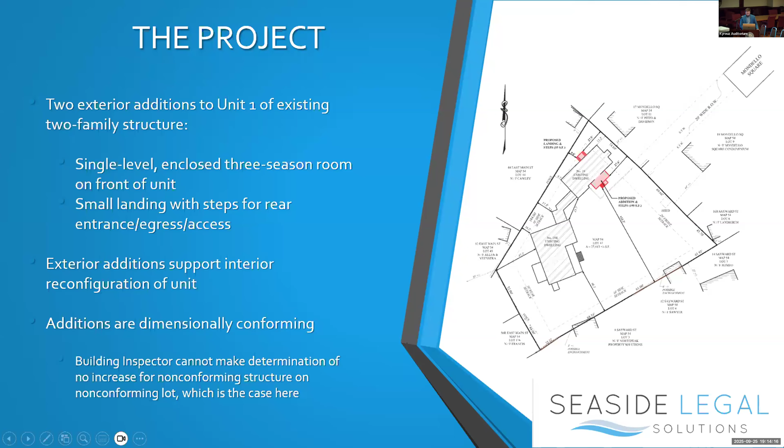Just by way of background, we're in the R10. The existing 2-family structure, we actually permitted that via special permit last year, for the change of use. And the addition to the structure itself, again last year, was dimensionally conforming. So this board gave it a determination that no special permit was necessary.

The existing nonconformities are, as I mentioned, the Mondello Square butts out at the property, so we have insufficient actual frontage. And the existing Unit 1 actually encroaches - again this is the rear of the structure, but it is the right side yard setback area. So there is a slight existing encroachment there.

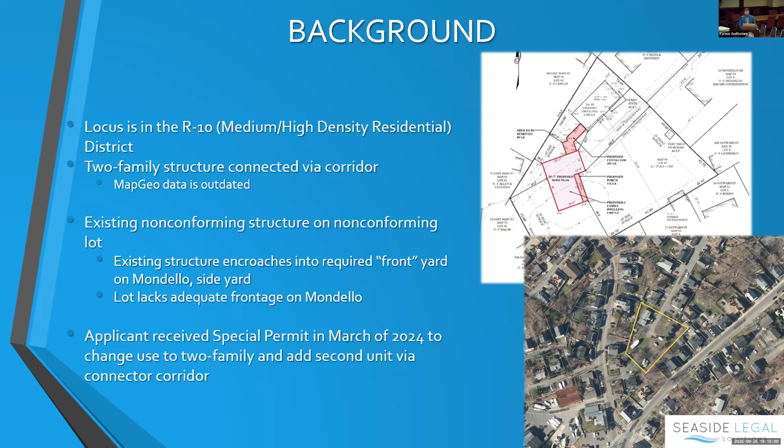So again, tonight we're going to be requesting another determination that there is no increase in the non-conforming nature of the structure. And if the board does decide that there is an increase in the non-conforming nature, we would ask in the alternative for a special permit to alter and expand the non-conforming structure.

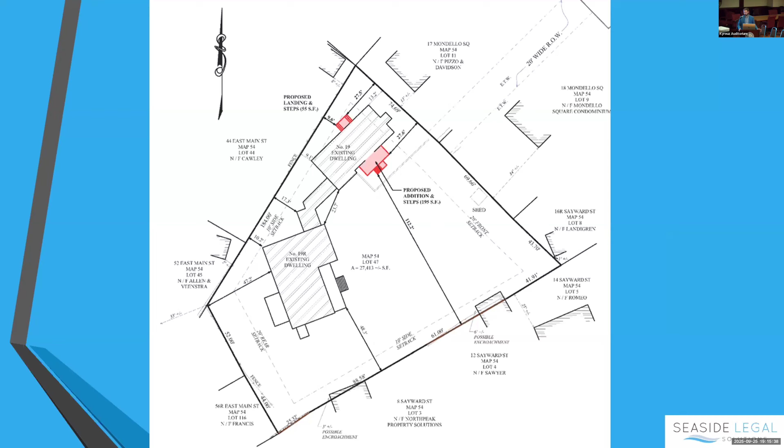So here are the plans. You can see on the site plan that front and rear addition, they're both dimensionally conforming. That rear addition does encroach slightly into that right side yard setback area, but it is only an uncovered landing and steps, so it's within that 3-foot allowance. So it is all dimensionally conforming.

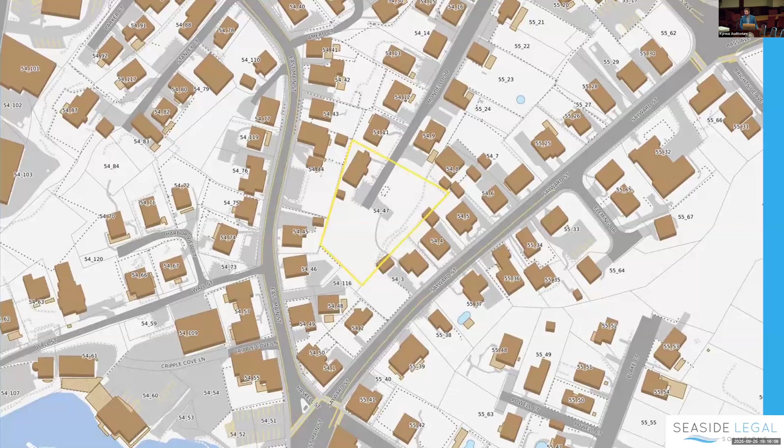So again, the building inspector can't make a determination that there's no increase in nonconformity where the lot and the structure are both nonconforming, but the board under 2.4.4B can make a superseding determination. And for the following reasons, I will ask that you make that determination.

So the existing nonconformities again are the lack of frontage, and as you can see zoomed in here, there's a front yard setback encroachment of the existing structure.

Again, though I keep saying that we're adding an addition to the front of the structure for setback purposes, we're not doing anything in that front yard setback area. And that rear addition is just partially in the right side yard setback area, but it is well within that 3-foot allowance. So we're not doing anything that increases any nonconformity, in my opinion, and I would hope that you share that opinion.

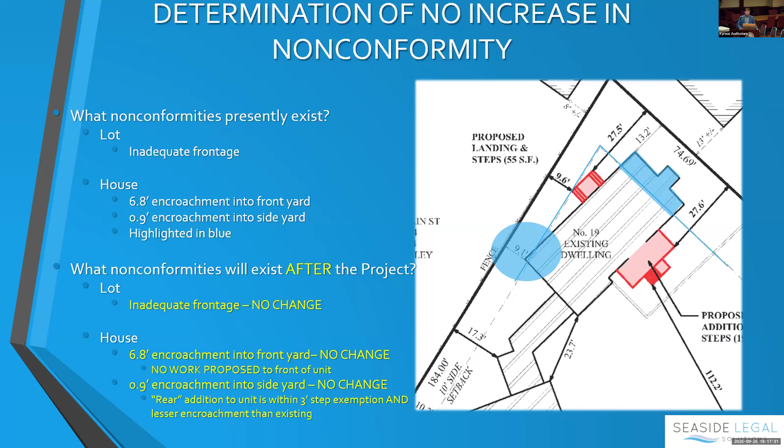But if you do decide that there is an increase, the standard for a special permit is that the alteration is not substantially more detrimental to the neighborhood than the existing non-conforming property. Here again, the additions are fully conforming. It's part of an overall rehab of the unit, so it'll match architecturally the new unit 2 I showed you, so it'll all be cohesive as one property. And again, we're not closer to any property lines than presently existing, so there won't be any major impact on abutting properties. So I'd ask that you determine there is no increase so we don't have to go through the special permit process.

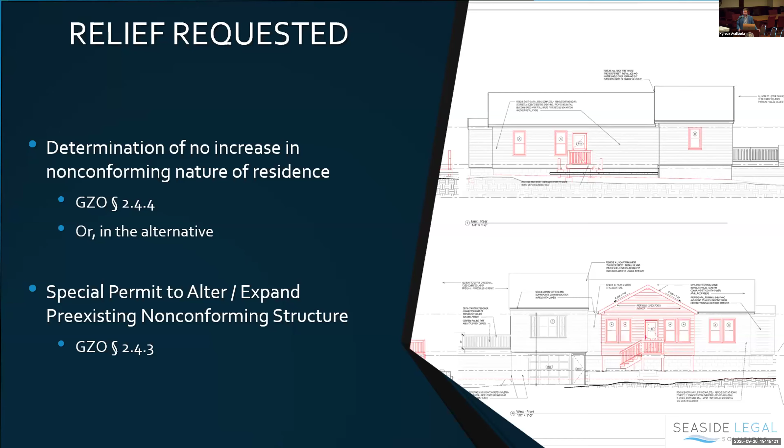But if you do find that there is an increase, we would ask for a special permit. Thank you. Any questions up front by the board?

So it's a two-step process. We're going to first determine whether we think there's an increase in nonconformity. I'll take public testimony up front on that, because if we make that decision I'd like anyone to be able to weigh in. So our first piece is we're going to vote on whether we think there's an increase in nonconformity. Does anyone want to speak in favor of that?

Is there anyone in the public that wishes to speak in opposition to us making a determination like that? Seeing none. Discussion by the board.

Okay, so our first thing would be to entertain a motion to make a determination that there's no increase in nonconformity and therefore it doesn't require a special permit. I would make a motion that there is no increase in nonconformity and that he does not need a special permit, for 19 Mondello Square. Would you second? Second. We have a motion made and seconded to determine that there is no increase in nonconformity, therefore a special permit under 2.4.3 is not required. Roll call vote.

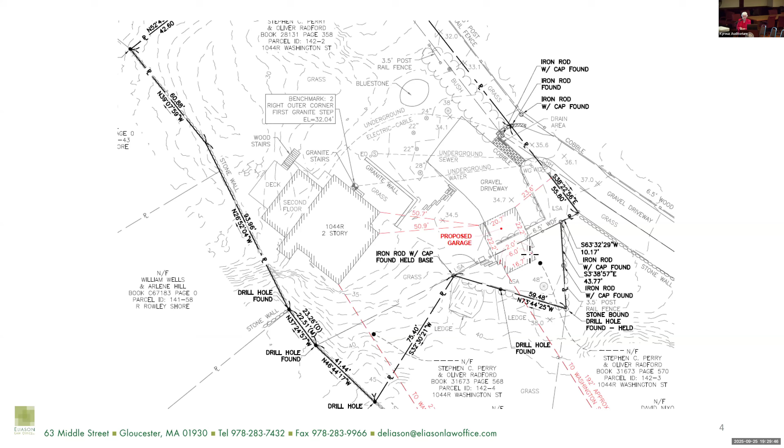This is in the R20 zone. The combined lot will be 35,014 square feet, where only 20,000 is required. The proposed garage meets all the accessory building setbacks. It's 192 feet from Washington Street, where only 30 feet is required. It's more than 15 feet from the side yards and well over 15 feet from the rear yard. The height will be 11 feet 8 inches, where 12 feet is allowed.

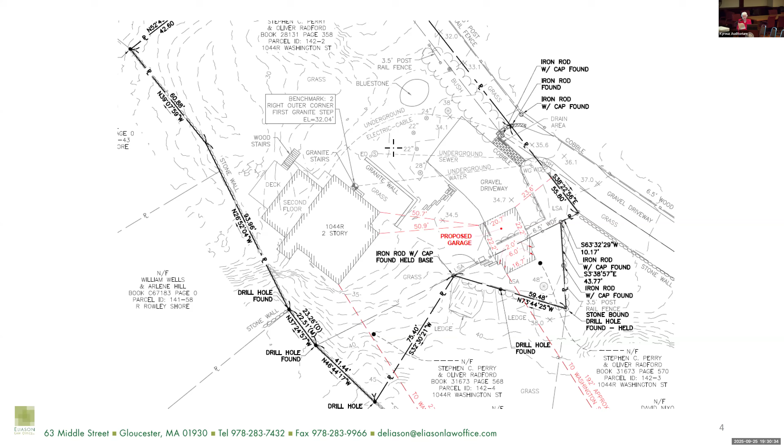So have you— oh, not yet. Let her present. I'm sorry, yeah, I'll wait.

The variance also doesn't undercut the substantial intent and purpose of the ordinance, which is primarily to prevent construction of accessory buildings in the front yard for aesthetic reasons. The garage will be a significant distance from the street, and it will be screened from the public way and residences by a fence and an existing tree that will remain. All the dimensional requirements have been met. Based on all these facts, I would request that the variance be granted and that it does not cause substantial harm to the public good. Happy to answer any questions.

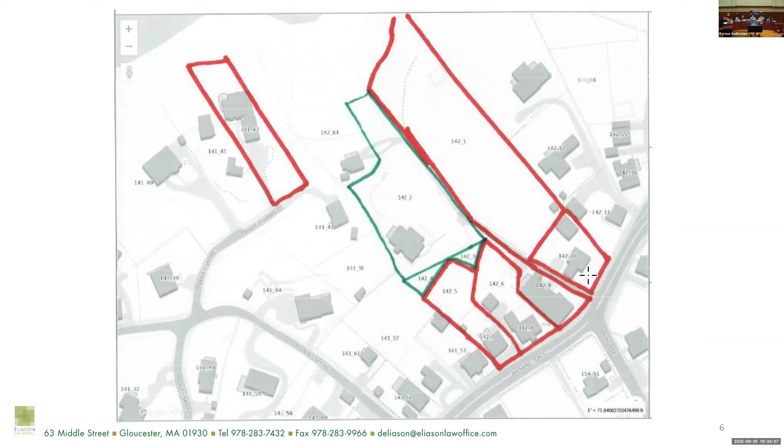I mean, it's the strangest situation where Washington Street is your frontage and you have sort of a driveway, kind of like that church, to get to it. So I don't have any objection to where it is. I have no objection, I don't see any problem.

I think they maybe misunderstood what was being proposed. I think they'll must get a chance to speak. We'll make sure you get a chance to speak. Any comment at all? I don't have anything further to add on that letter. I think they clearly were misunderstanding what was being proposed. It's no apartment, it's a two-car garage, and it's less than 12 feet tall.

Yeah, exactly. Okay, attorney, go ahead, Ron. I apologize, I think you said this and I didn't catch it, but what was the distance between the corners of the garage and the perimeter there? Because I don't see them on the drawing. Did I hear you say 15 feet in each case? 15 feet is required. One side is 23 feet plus, and the other side is well over. It would be from here to here, so it's maybe 100 feet.

What I'm talking about is the rear side of the garage to the edge of the property line. This corner, yes, okay, and the other corner, and those are not setbacks. I'm just curious.

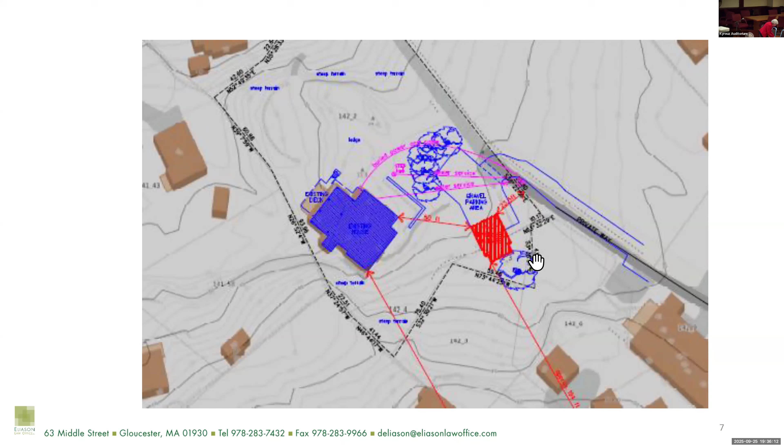We'll take some public testimony. Anyone wishing to speak in favor of the application, please come forward or raise your hand. Anyone in favor? I'm sorry? Sure, are you speaking in favor or against? One second then, okay.

Can we take the screen down so I can see the public? Attorney Eliason? Oh, thank you. Okay, I see none. Any opposition to the application like to speak? Come forward, we need your name and address for the record, and then you can speak.

My name is David Lane Mixon, and I live at 1042 Washington Street with Frankie. The proposed garage is blocking our view towards the water and increasing the value of their home, but diminishing ours. We have some photographs so we can show.

Let me see, I want to make sure I got who's who here, for 1042. Can you come up and clarify for us? Which is your house? Washington Street's out. This is yours, the big building? Right here. Yeah, oh, that building. Yeah, now I don't even know if they have a foot. Chairman, what lot number is that? I'm just looking at it, Pete, that's 142-8. Okay, I see it, yeah, right off of Rose Street. Correct.